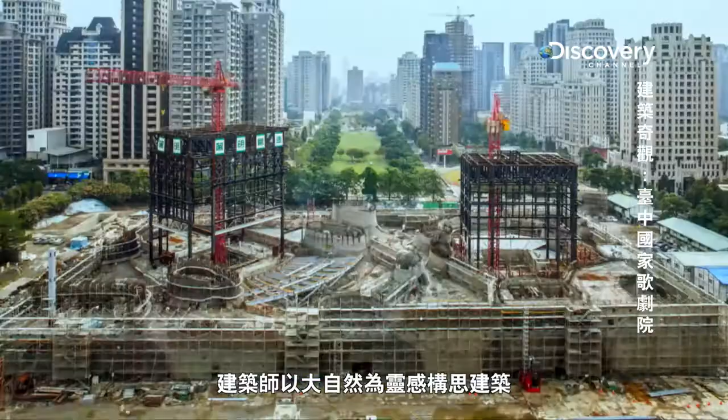The National Taichung Theatre. Its architect envisions a building inspired by nature, and even more beautiful within than on the outside.

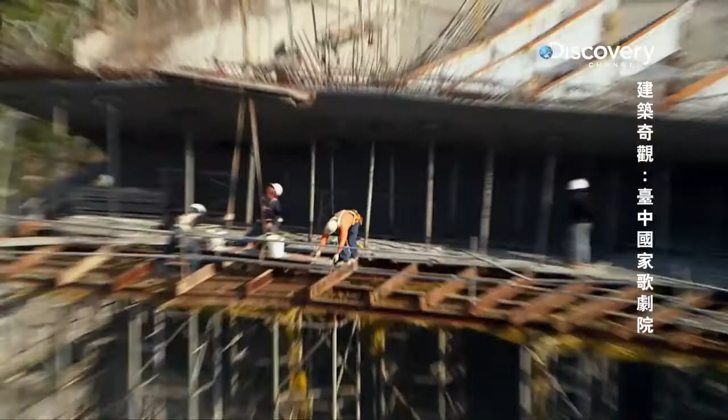But how do you build walls that disobey the laws of engineering? Many engineers didn't believe that this can be done. It's a race against time and money to build this ambitious structure.

Taichung's vibrant manufacturing industries are synonymous with the words 'made in Taiwan.' In a few decades, it became one of the country's most prosperous cities. Old buildings made way for new architecture and facilities.

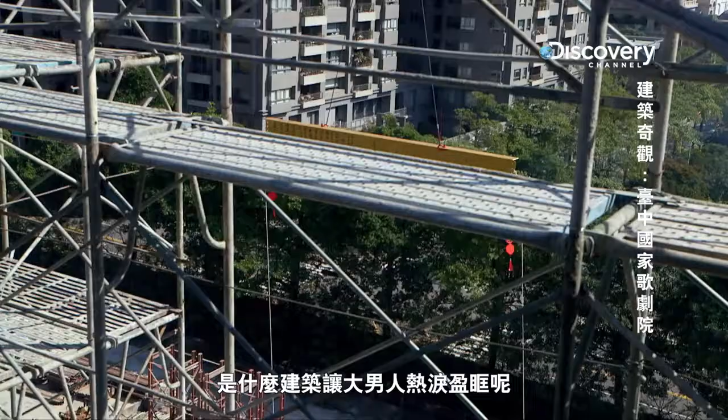A building dreamed up by this man. Japanese architect Toyo Ito is known for his maverick ideas. For Taichung, Ito is pulling out the stops to create something totally unique.

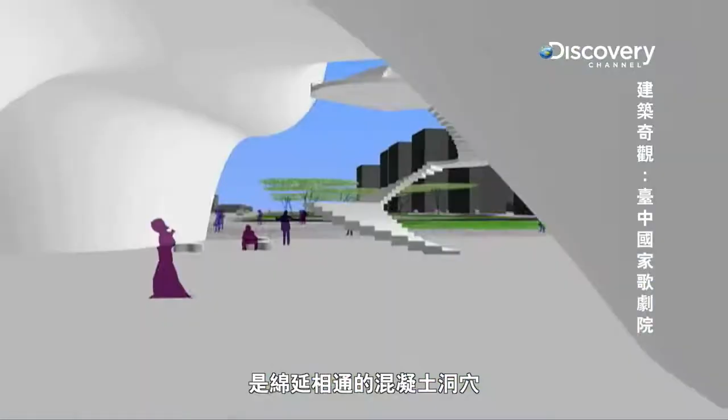Ito's concept is a building made up of a continuous network of concrete caves. In theory, the curved walls simulate the pleasing acoustic effect that you hear in natural caves, creating a one-of-a-kind, world-class theatre experience.

Ito's unique vision is groundbreaking, if everything goes to plan. For engineers, turning his radical idea into something buildable is a mind-boggling task.

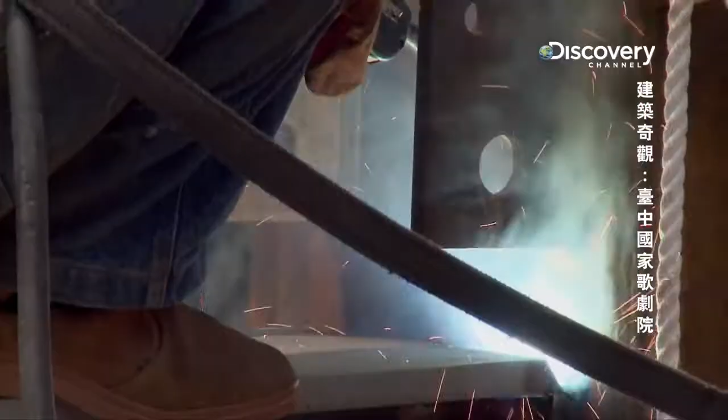Because with current construction methods, there may be some obstacles. They are trying to ignore everything they know and invent brand new rules.

Taiwan has made impossible buildings possible before. The gravity-defying Taipei 101, Taiwan's tallest skyscraper, still ranks as an incredible feat of engineering. But the slopes and curves of the National Taichung Theatre seem to defy the rules of geometry.

The geometry of this curved structure is all irregular. You cannot find any radius or curvature the same at two different points. So nothing is repeating and in line. This is a very first experience to all the engineers in the world.

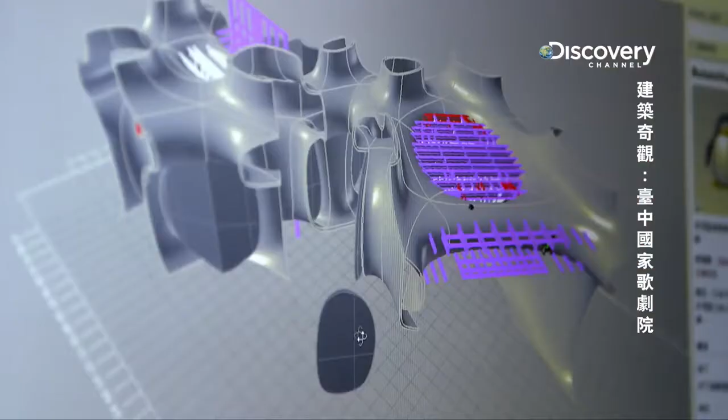Engineers immediately turn to cutting-edge 3D modeling software for a solution. Structural experts Arup are put in charge. Solving unusual shapes are hallmarks of another building they helped design.

The theatre will be the world's first large-scale building using curved walls instead of beams and columns to support its entire structure.

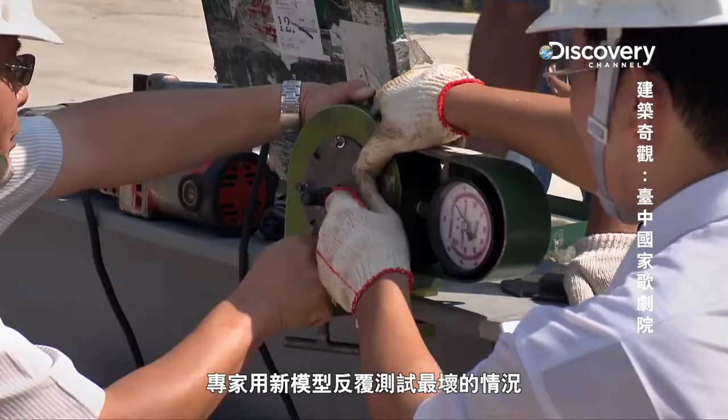They rigorously test worst-case scenarios on their new model. In order to convince ourselves, convince our reviewers that it can be done, we needed to very closely model and understand how the force flows in these very continuous walls and where the reinforcement elements need to go and where it might or might not crack.

As engineers translate their 3D blueprint into real-world construction of the walls, work begins on the construction of two massive fly towers.

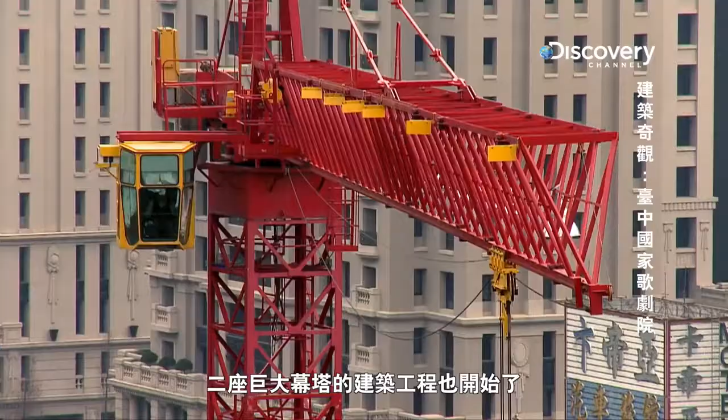Builders first dig a foundation 2 floors underground. Anchor bolts are then driven into it to secure the roots of the towers. A 1.5-meter concrete slab is then laid over the top of this foundation. The exposed tips of the anchor bolts above ground are fastened to base plates located beneath each steel column.

This creates a super strong foundation layer able to withstand violent shakes in the event of an earthquake.

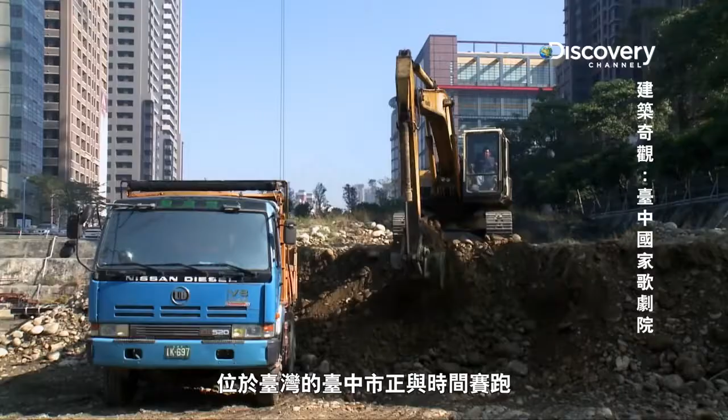The Taiwanese city of Taichung is racing against time to construct an iconic building it commissioned more than a decade ago. No city is alive unless it has attractive buildings.

This is being attractive on a global level. You're not competing with other localities. You're competing with the world.

Problem solving has to begin at the heart of the matter. To make it curve, engineers have no choice but to manually cut.

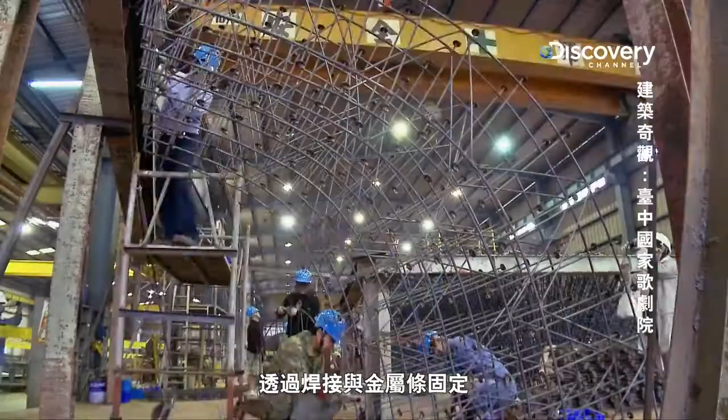To increase its strength, engineers weave the rebars into a 3-layer grid, interlocked by welding and wires. They use twice the amount of rebars it usually takes for walls.

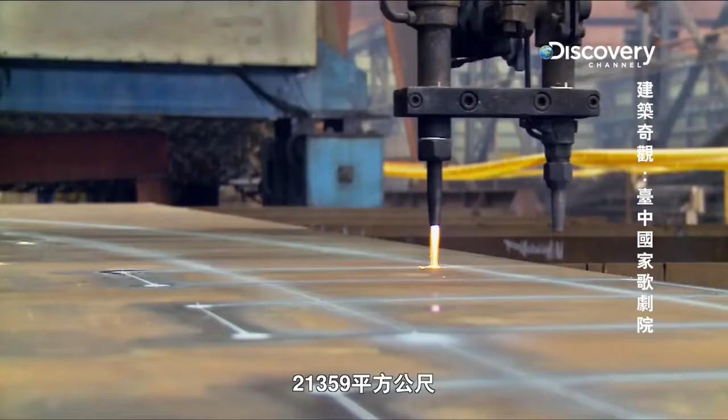This method not only simplifies the operation, but also shortens the time it takes to do the job.

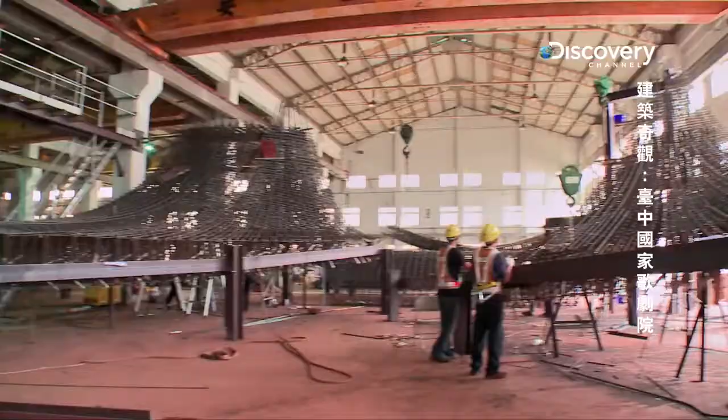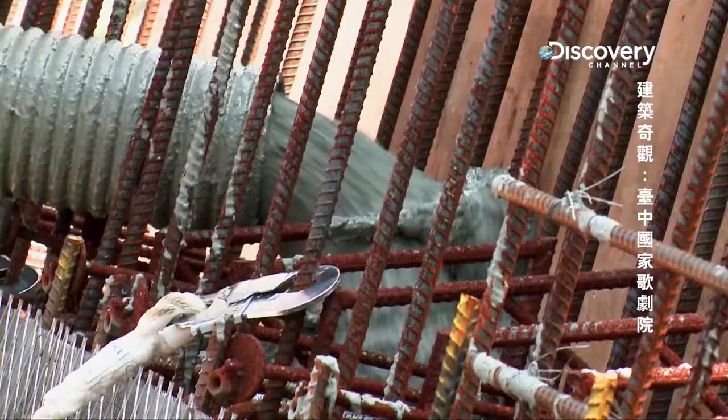After figuring out how to build a sturdy steel skeleton for the walls, the team has to quickly design a special curved formwork to set the walls.

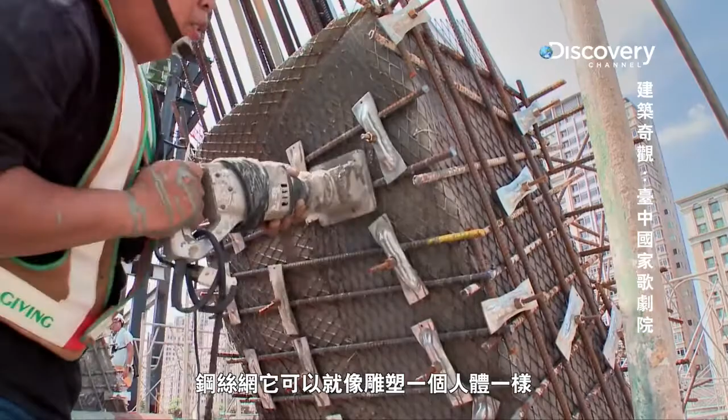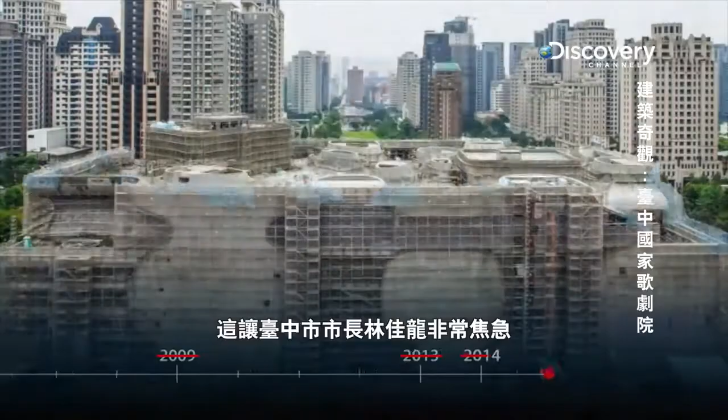This makes Taichung's mayor, Lin Chia-lung, anxious. The pressure from the city council is increasing. So we have to control the budget. And the other challenge is from the time constraint.

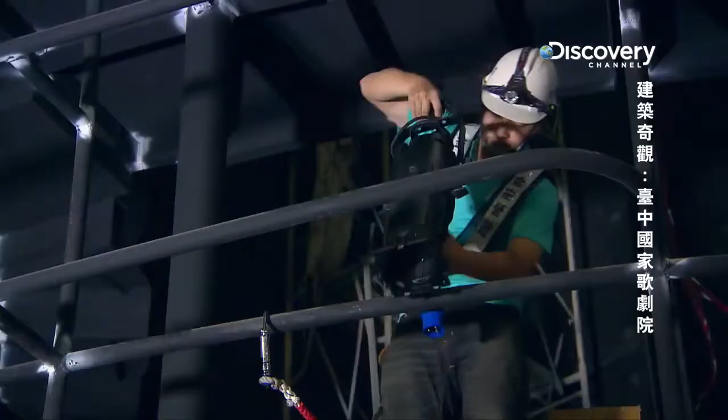With the most crucial stages of construction now complete, but is the job done for Ito?

Thank you for making a great contribution to this city. Thank you very much. Building Taiwan's National Taichung Theatre has been a 10-year journey.

The real test will have to be a live performance. Today we welcome friends of the arts from around the world to join us in celebrating the grand opening of National Taichung Theatre.

And it's music to the ears for a team led by 2 mayors and a multinational group of architects and engineers who reflect on a project that has taken them over 10 years to complete.